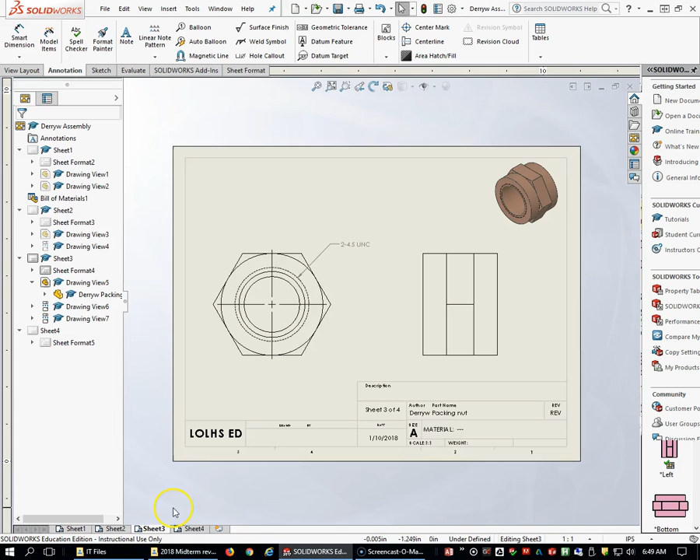Okay, video 6 of Engineering Design Midterm Review. We've got to complete dimensioning the packing nut. We have a couple of errors I noticed we're going to need to correct along the way.

First off, if we select this right-hand view here and add hidden lines, you'll notice that the threads do not go all the way in. Some of you I helped correct this when you were making the part initially, but we're going to make the correction on that now. Also, this dimension here is incomplete. It does indicate our thread size, but it doesn't indicate the rest of the hole.

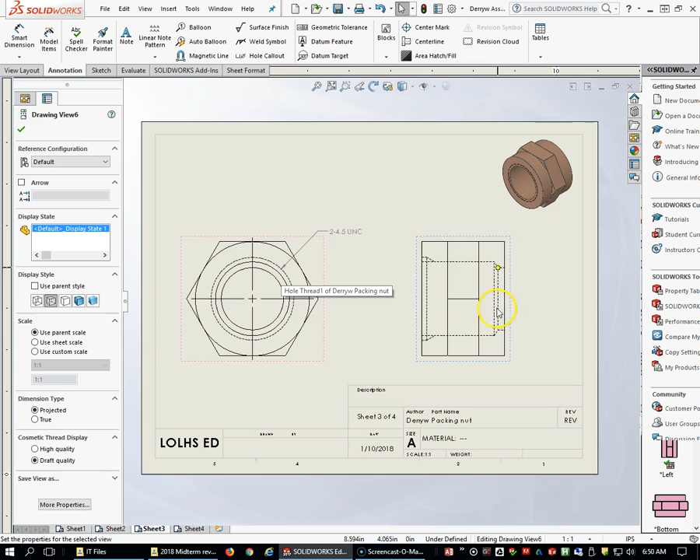So I'm going to go ahead and delete that dimension, and we're going to go in and instead use our hole notes, hole callout, and we're going to select this line in here, and you're going to see that we're going to get all of the information we need. This is also going to point out the error that I made in the part.

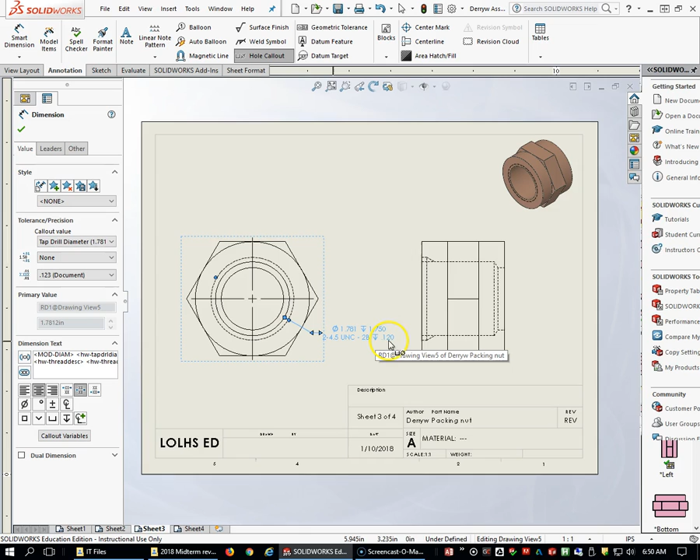So when I put this dimension in, you'll see that the depth of those threads, this indicates right here, this indicates the depths of the threads. It's only going in about 1/8 of an inch when those threads really need to go the full depth of the hole. So how are we going to fix that?

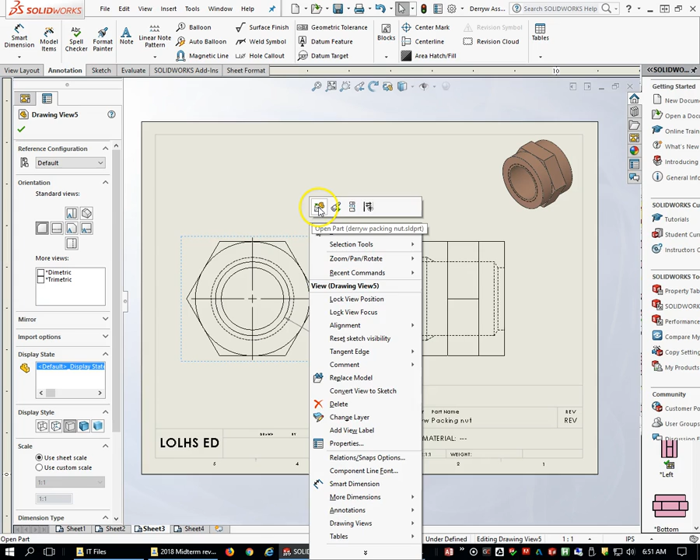Well, if we right click on the dotted lines, oops, get out of this command. If we right click on the dotted lines on our view, we can go right here and open up the part. It'll launch the part for us, and then we're going to go ahead and go in and edit that feature. So the feature here that's associated with the threads is this tapped hole, and we're going to come right in here and edit it,

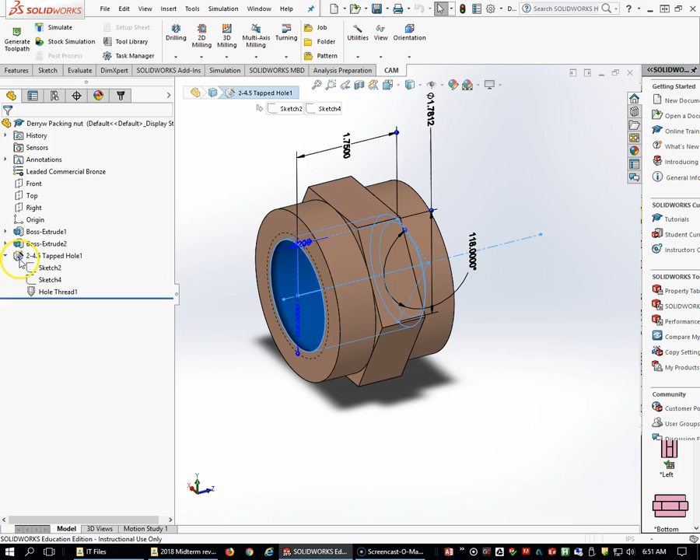and this dialog box comes up. All right, we can identify our errors right here. First off, the depth of the hole is 1 3/4, and this is only 0.12. So we're going to change this to match the depth of our hole. And some of you may have had this near side countersink selected. Make sure that that's off as well while you're there.

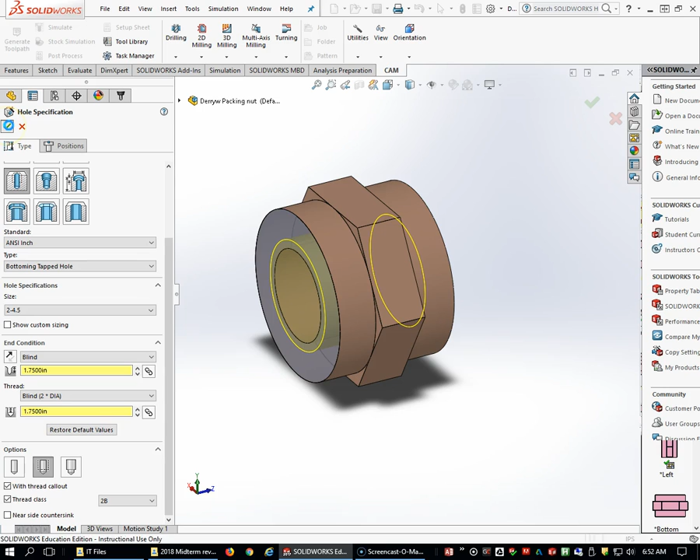Going to hit OK. And notice that my threads are showing on this part. Quick review on that in case some of you don't have those showing. If you go into Document Properties, into Detailing, you want to make sure that Shaded Cosmetic Threads is on. That's this button right here. And I'm going to hit Save.

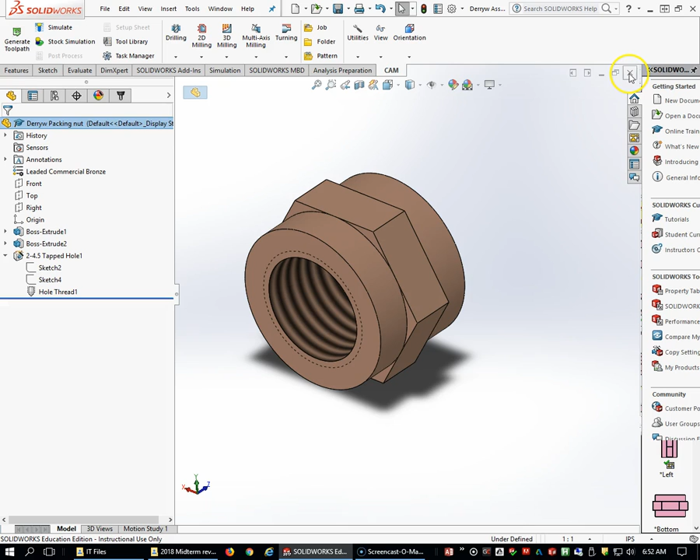I think that's document specific, so we may need to close out that part. We may need to make the changes to the drawing file as well. We'll take a look at that in just a second. Alright, you can see that the cosmetic threads are not showing up here, but you will notice that in making that change, it automatically updated the drawing file, which is nice. So this is showing the full depth. Threads are now showing the full depth.

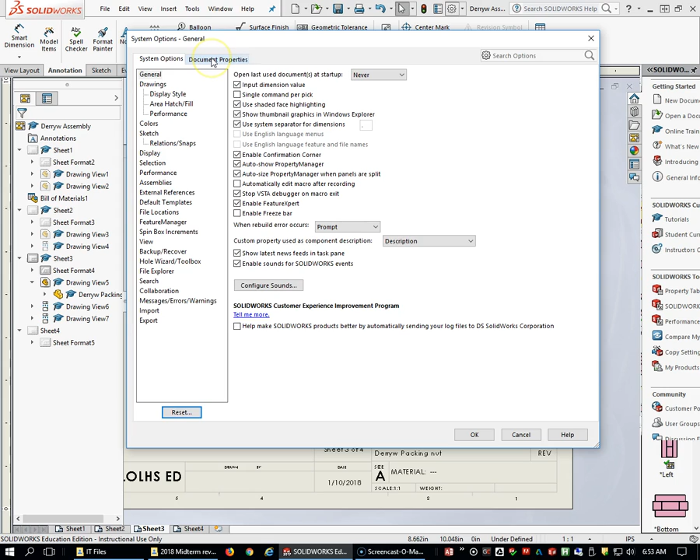We just need to have the threads show here. So we're going to jump into this, go back to Document Properties, hit Detailing, and hit Shaded, and then our cosmetic threads will show there.

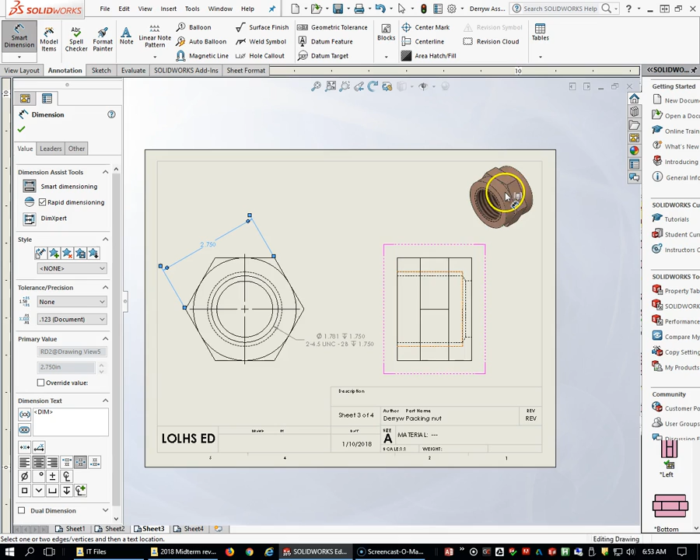Okay, now we can go about finishing putting the dimensions on the packing nut. We need to give the size of the nut, so we can put a smart dimension across these flats and set that right there. We also need to give the overall width of the part and how far each of these go. So with my smart dimensions, I'm going to come in here. It's running kind of slowly today. And we have an overall depth.

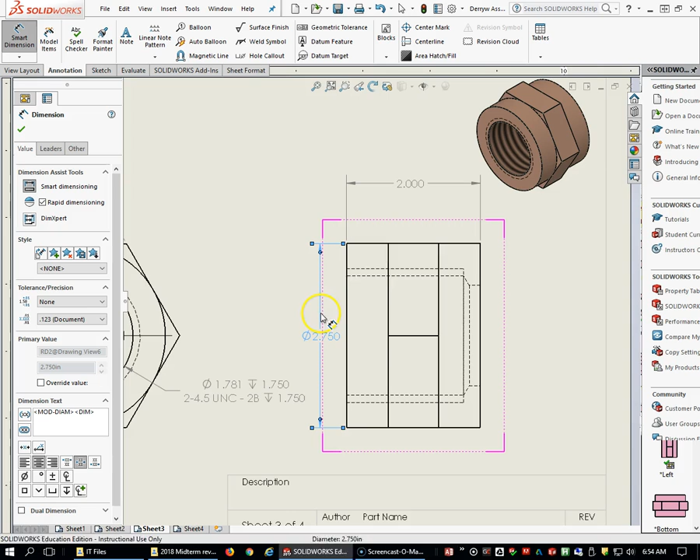And come back again. It's not letting me select that. I'm going to go ahead and add this dimension in that, get out of there.

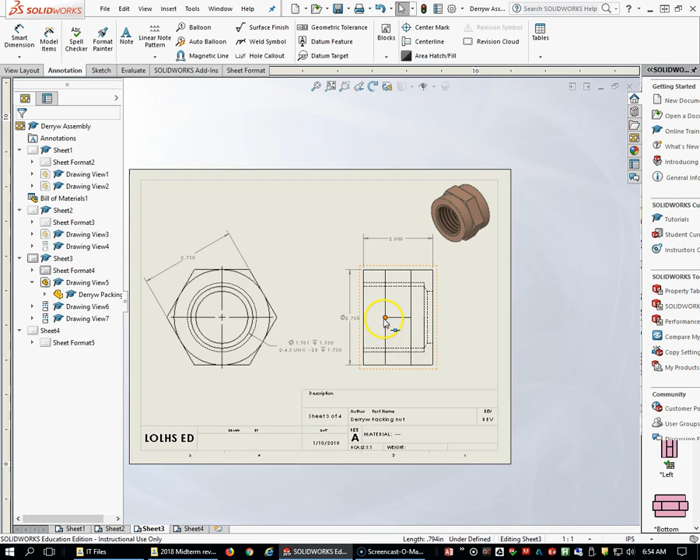The diameter dimension is going to match the flat to flat distance. But I just want to remind everyone that if you're dimensioning a cylinder, it's done in its rectangular view, not in the circular view over here. It's a question of whether that's a duplicate dimension, but I'm going to put it in there.

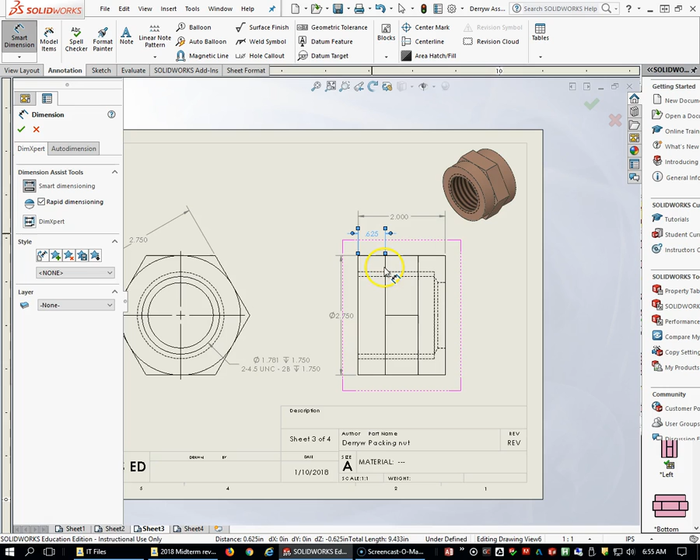And then I want to get a dimension from here to here. Oops. And we can do the same thing one more time on this side, or we can dimension this guy right here.

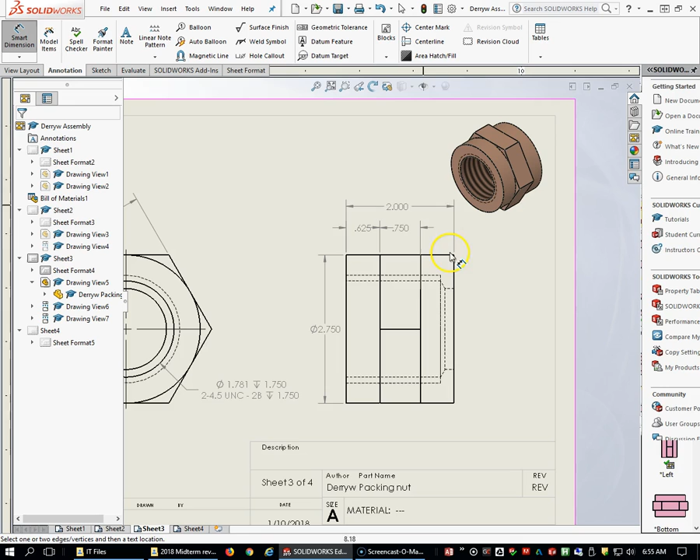Now we've got an issue with these lines, these arrowheads, because of the size of our dimension here. I'm going to leave that alone for this time, but it's a little bit crowded. We could possibly stagger those dimensions and make it look a little bit cleaner. Or actually, what I'm going to do is delete that, and instead of doing it as a chain, I'm going to put the dimension on the other side.

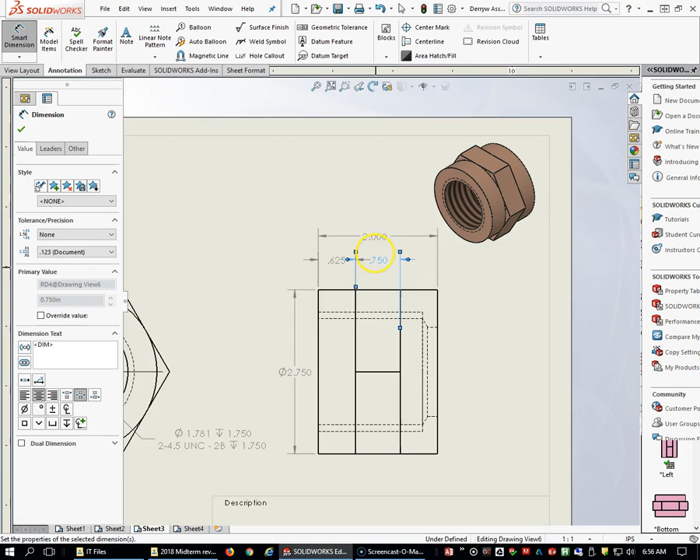My computer is running very slowly.

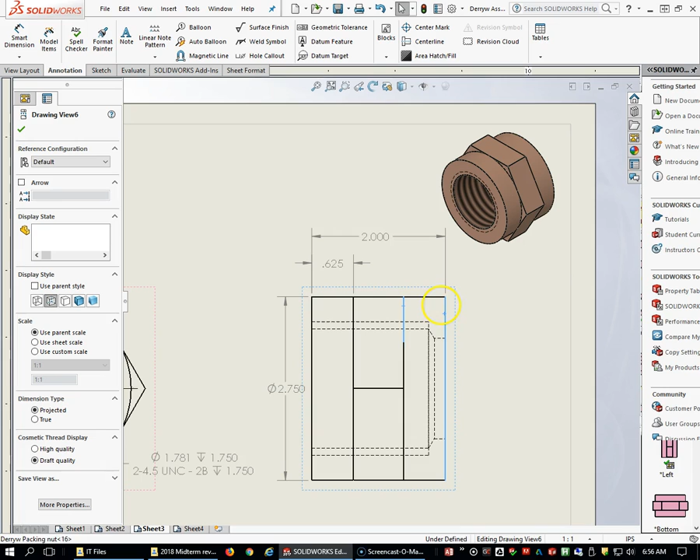I think that looks a little cleaner. We'll do it like that. So we want to just take a look here. This hole note covers the threads, and it covers the hole that's drilled to this, but it does not cover the diameter of the hole passing all the way through. So I'm just going to grab my smart dimension here and make sure that we cover that hole as well.

And so we've got the distance flat to flat. We've got our threads identified here and the depth of those threads. We've got this hole covered. We've got the overall depth of the part. This part is complete. And I'm going to pause and then make another video to do that last part and change some properties.